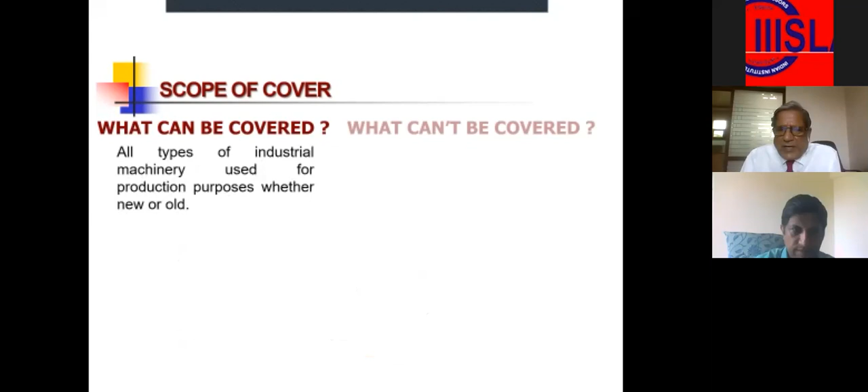Let's see, first of all, scope of cover. Now what can be covered in this policy and what cannot be covered? All types of industrial machinery used for production purpose, whether new or old, can be covered under this policy. What can't be covered? Machinery under erection and testing cannot be covered; only operational machinery can be covered here. Machinery under testing and erection shall be covered under the EAR policy and other policies. Computers and biomedical equipment are covered under electronic equipment policies, so they cannot be covered here.

Now, declined machinery - certain machines are declined by the insurance company because of the very high claim ratio: rolling mill stands, PVC lined vessels, oil-fired furnaces, pumps, and glass, graphite, rubber impeller lined, portable mobile equipment, and any imported machinery that cannot be repaired here. Now, this has changed, in fact.

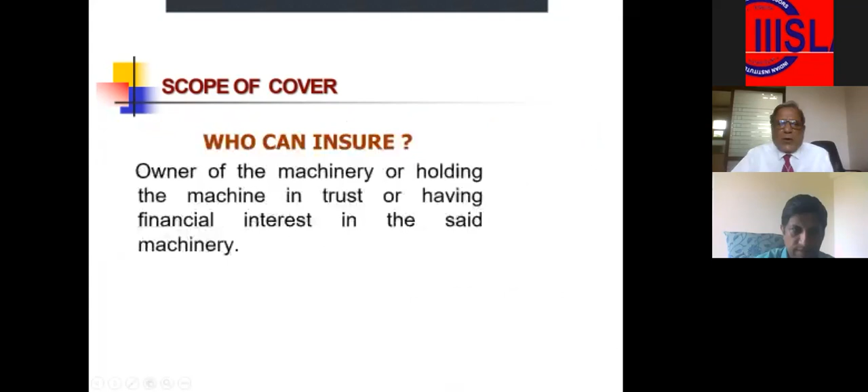Who can insure? The owner of the machinery, or anyone holding the machine in trust or having financial interest in it, can insure the machine, because anybody with an insurable interest in the property can insure it.

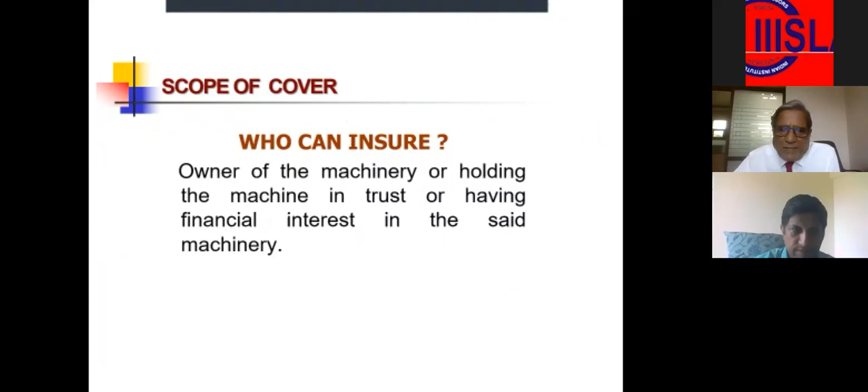What is covered under a machinery insurance policy? That's a very important point. Any unforeseen and sudden physical damage by any cause not excluded.

See this machine, if it's under breakdown, you can physically see the damage. But here, this is a card. If this card fails, you can't see the failure or the component that failed visibly. You can only find it using a multimeter or other electrical device or jig to locate where the fault has occurred.

So physical does not really mean visible. Here it is visible, here it may not be visible, but it may be electrically failed. So it also comes under physical damage by any cause not excluded. Can you say once more? Any unforeseen and sudden physical damage by any cause not excluded.

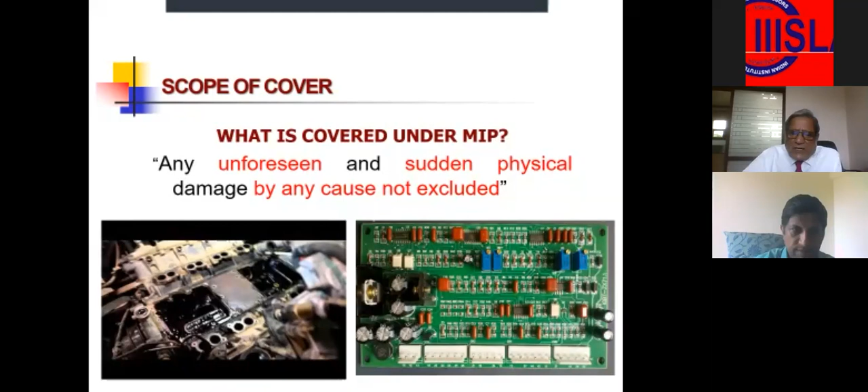Now, what kind of causes can we summarize in general, though the definition is quite large - any sudden physical damage. I have tried to summarize some mechanical causes which can be covered, but this list does not contain everything, because anything can happen. I have just given some broad outline.

Faulty material, design, construction or erection, vibration, maladjustment, misalignment, defective lubrication, loosening of parts, abnormal stresses, molecular fatigue, self-heating, centrifugal forces, explosion due to internal pressure, or implosion due to internal vacuum - these are the internal mechanical causes.

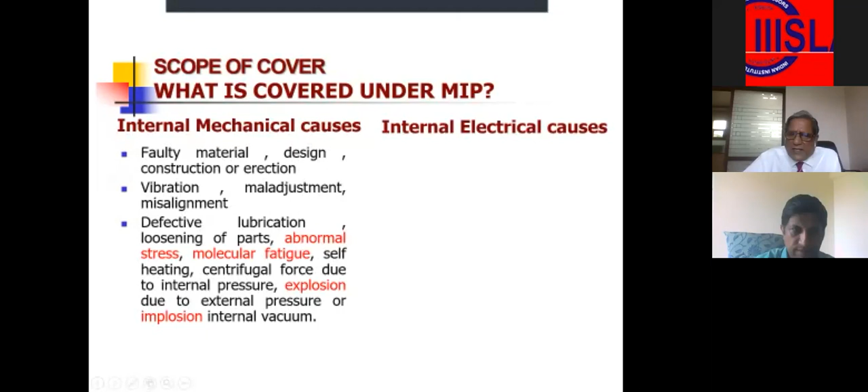Now let's see the broad internal electrical causes of breakdown: excessive electrical pressure, whether due to atmospheric electricity or otherwise, failure of insulation, overrunning, short circuit, leakage of electricity, open circuit, arcing including damage by internal fire so set up, and failure of connected machinery or protective devices.

Here you see atmospheric electricity - this means lightning. If lightning strikes somewhere as a result of which equipment fails, as I discussed in my previous lecture about the fire peril, it will be covered here in the machinery insurance policy, not in the fire policy, though lightning is a covered peril under fire policy. The reason, as I explained there, is because it is primarily a breakdown and it is excluded there. So even if it fails, it is covered under this policy.

Now I'll discuss a few of these things because there is a lot of confusion. Somebody will say molecular fatigue is not covered, somebody will ask what is excessive electrical pressure, somebody will say overrunning means overloading. So there's confusion about these terminologies. I've tried to clear this up - what is excessive electrical pressure, what we mean by overrunning, and what we mean by material molecular fatigue and abnormal stresses. Abnormal stresses may be confused with overloading, and overrunning may be thought to be due to bad operation, but that's not the case.

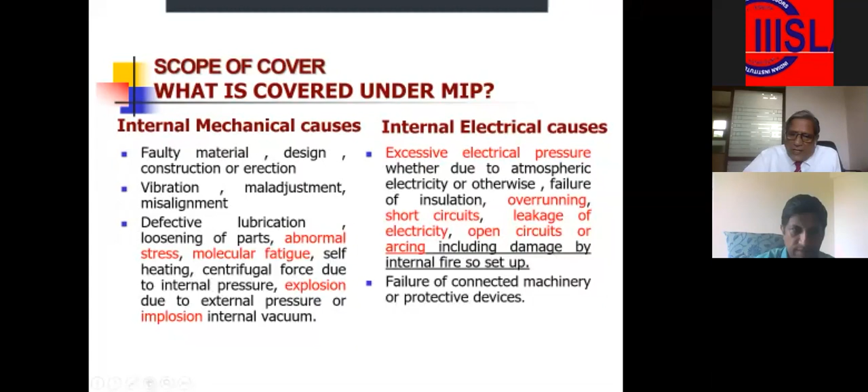Now the principle: if you see overrunning in a machine, when a motor runs, the output speed and torque both increase in current until it reaches the rated speed. All of you agree with this.

Having worked for a long period at rated speed, a back EMF is generated in the motor core, increasing significantly. Anybody who knows electrical engineering can say that if the motor runs for a prolonged time at the rated speed, a back EMF is generated. This is basically called Lenz's law. You must be aware of this.

Now, the highest torque is produced at what is called the knee point. Beyond this, when the motor goes beyond it, the back EMF starts increasing with constant power and proportionate reduction in current. It means the back EMF supersedes the actual EMF which tends to drive the motor, and this ultimately results in decreased torque, but the speed keeps on increasing beyond the rated speed till it reaches maximum possible speed. Operation beyond which causes damage to the motor, either thermal or mechanical.

So overrunning is basically nothing but when the motor is run for a prolonged period at this optimum speed, and the back EMF takes over the original EMF that produces the torque, which tends to increase the RPM, but the current will lower down. The speed will keep going on, and as a result there will be thermal and mechanical stress on the motor.

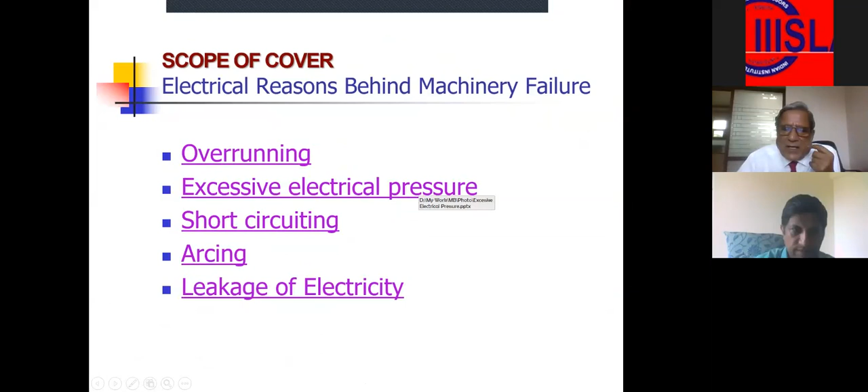The word 'pressure' is a little confusing. What do we need, what do we mean by electrical pressure? Excessive electrical pressure - what do we mean by electrical pressure? Let's see what we mean.

Now, electrical current moves with electrons in a conductor - that's the basic principle. The force which pushes these electrons to circulate in the conductor is called electromotive force, sometimes referred to as electrical pressure. The force which pushes the electrons to move within a conductor as a flow of electricity is called EMF or electrical pressure.

If there is a voltage spike, a sudden increase in voltage for a very short period of time in the supply, high current will be drawn by the connected load machinery. It also causes heavy losses to the equipment, resulting in heat generation. So a sudden voltage spike or push may lead to high current, meaning the machine will heat up and may fail. That is the meaning of excessive electrical pressure in machinery.

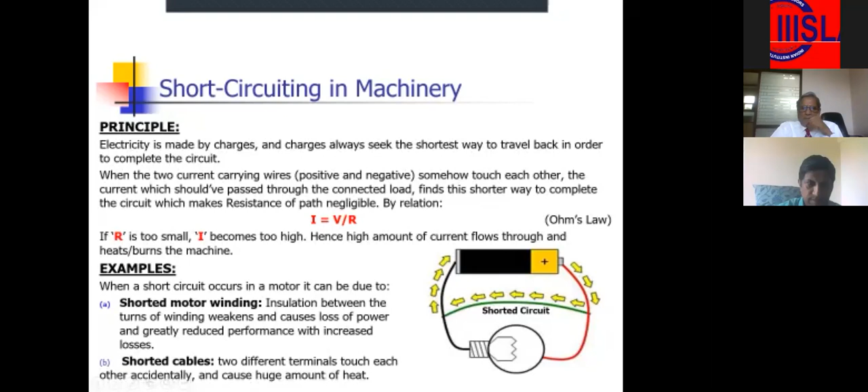Now what is arcing? When there is a gap between two oppositely charged terminals, the electron on the negative terminal tries to find a path to jump to the positive one. The electron is desperate to create a conduction through the non-conductive medium, which is air. Now, if the potential difference is sufficiently high between these two connections, in spite of their gap, it tends to ionize the air occupying the gap between them.

The current passes through the air, producing plasma, which may produce visible light. But the condition is there should be a sufficiently high potential difference between the two terminals, only then this will happen. Plasma is basically the fourth state of matter, other than solid, liquid, gas, which exists only at a very high temperature.

Here you see a high current connection in a HT line. Just as it releases, you see how much flash it generates. This is the arcing, this is basically the arcing.

The definition of an open circuit is a broken path for an electrical current due to an open switch or frayed wire. When this terminal accidentally gets near any metallic body, sometimes the machine itself, it produces an arc with very high temperature, with visible spark that can cause fire and other severe damage to the machine. This is how you see fire basically due to arcing in an electrical machine.

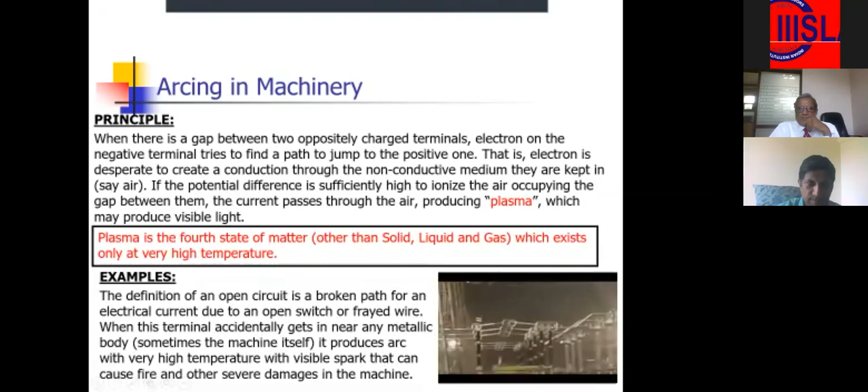Now, I have discussed 3 important electrical reasons. Now I discussed 3 important mechanical reasons. There's generally confusion about why specifically I've chosen these 3, because abnormal stresses get confused with overloading, molecular fatigue gets confused with electrical manufacturing defect, and explosion implosion, as you know, is covered in the fire policy, but the equipment causing explosion is excluded there, which is covered here in the machinery policy.

Now let's see abnormal stresses. These are the kind of stresses we face when any machine, any part working within a machine, can be stressed due to several reasons. It may be a compressive stress, it may be a tensile stress, it may be a shear stress, it may be a torsional stress, it may be a bending stress. By the picture you can see that any part, any machine, can have these kinds of stresses during operation.

But if they are sustained for a long time and not addressed by the operator or by the maintenance, they can result in the failure of the machine. Pushing, squeezing against something is a compressive stress; tensile stress you see by these directions; and shear stress is just shearing, slippage along a plane causing change in shape; twisting of a structure or shaft is called torsional stress; and this is bending and reshaping of a structure. So these are broadly the abnormal stresses in machinery.

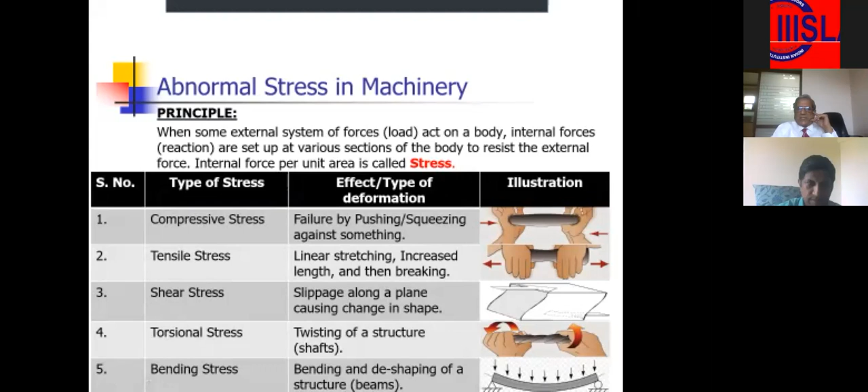Now molecular fatigue, that's very important.

Fatigue is the weakening of a material caused by cyclic loading that results in progressive and localized structural damage and the growth of a crack. Once a fatigue crack is initiated, each loading cycle will grow the crack a small amount, typically producing striations on some part of the fracture surface. This leads to the ultimate failure of the machine.

It slowly grows; a small crack appears in a cyclic motion. An example is a machine that involves reciprocating or repeated motion with a certain amplitude, like a piston cylinder. They are most prone to it. The fatigue failure is caused by initiation and propagation of cracks developed in the piston as a result of undesirable operational condition and material defect.

So anything moving in a cyclic motion, once put to stress, will create fatigue, and that cyclic load, if not addressed and it keeps increasing, will create a crack. These can be witnessed in a number of pistons when they are opened during normal operation. Even an engine, if it is working without any problem, if you open it you'll find this fatigue mark. Though it has not resulted in any breakdown, you can see the fatigue mark in the engine.

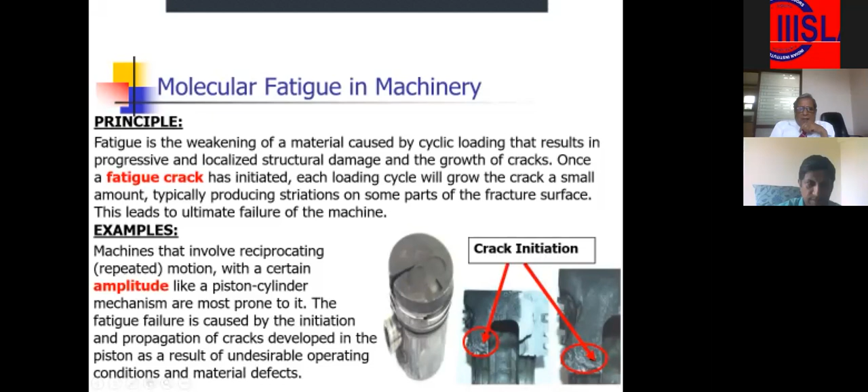Now, explosion and implosion. When a machinery structure that works under pressure cannot withstand the internal pressure buildup due to any reason, it results in the fluid coming out in a violent burst. This is called explosion. Here you see a rod, and every material of which the tank is made has a certain tolerance, a certain capacity, and if it goes beyond that, it will yield and produce an explosion effect. When the pressure inside the pressure vessel increases past the ultimate stress, it explodes violently.

It can occur in a compressor, boiler, etc. So this is a typical case of explosion. And this is a simple experiment showing it.

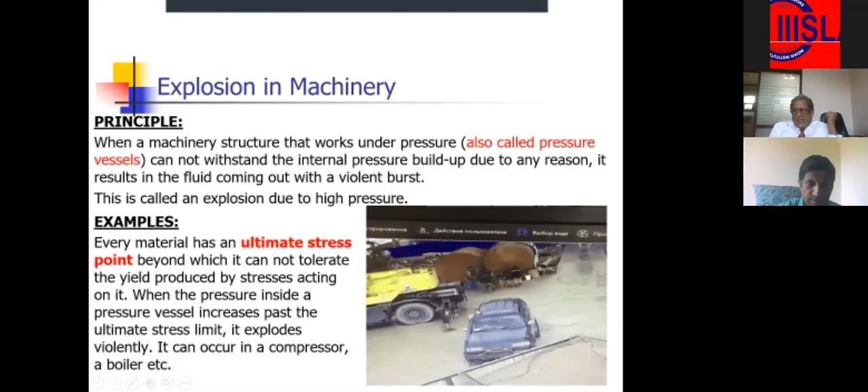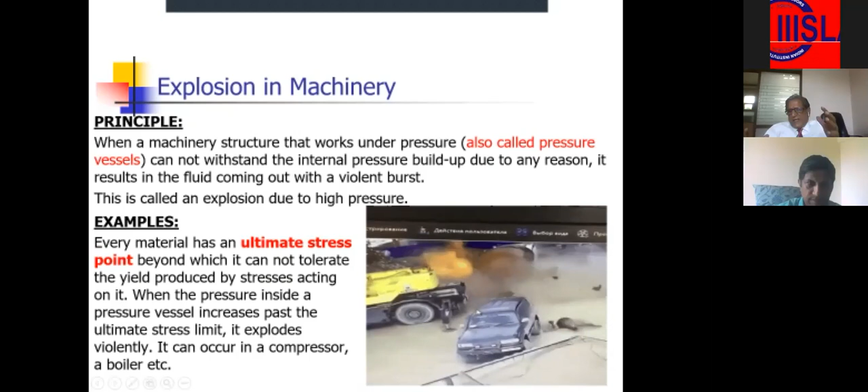Here you see a small container which has a chemical, a hot chemical in the form of gas, containing some residual hot chemical. And if you suddenly cool it, what will happen? The particles of the chemical, which have high molecular energy within this drum, will come closer because of the cooling, and suddenly it will collapse.

It will collapse inside. Originally there was a high temperature of the chemical inside, so there is molecular energy and a gap between the molecules. But once you cool it with cool water, sudden cooling will result in releasing of the molecular energy, with the molecules coming closer and causing a collapse in the drum. That's it.

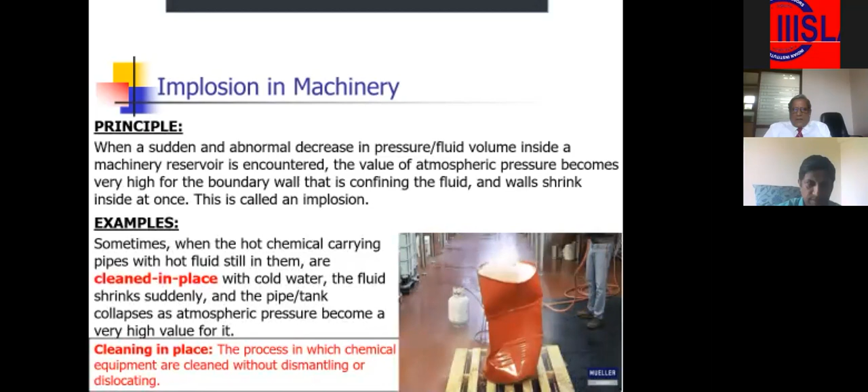Now, these basically explain the phenomenon using Ohm's law. If a short circuit occurs, it means resistance is nil, current is high, and voltage is nil. Open circuit means resistance is very high, voltage is very high, and current is nil. Excessive electrical pressure means voltage is very high, resistance constant, and current very high.

Leakage of electricity means current very high, heat generation very high, and losses very high. So these are the phenomena, these are the events which may occur, and these are the phenomena you can observe. This is basically nothing but Ohm's law, and based on this, these things are explained here.

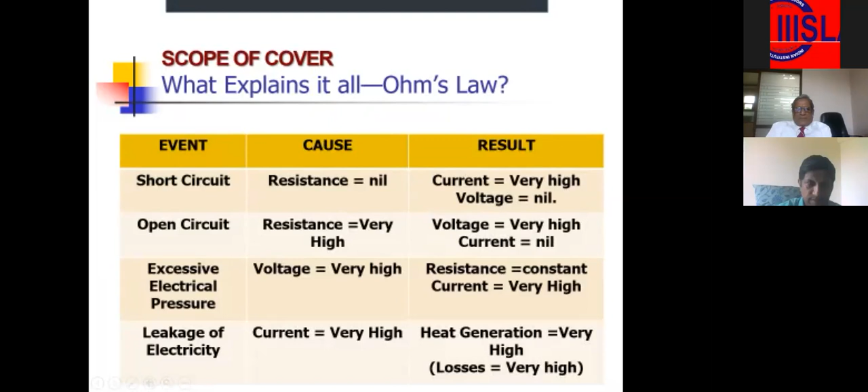Now, coming to what is covered under a machinery insurance policy. What is covered? External causes, lack of skill, carelessness or malice of a person. This is also covered, whether in the insured's employment or not.

Earlier we discussed internal causes, mechanical causes, and electrical causes. Now we are discussing external causes, which are neither mechanical nor electrical. Lack of skill, carelessness, or malice of a person, whether in the insured's employment or not, is covered in the policy.

Falling, impact, collision - if something fell on the machine during operation, it is also covered. It's not purely about breakdown occurring. If something fell on the machine - a machine is tall and something fell on it - it is also covered, or if the machine fell during shifting or during operation, it is also covered in the policy.

Obstruction or entry of a foreign body is also covered. Now, location of cover - the scope of cover is over, now coming to the location of cover. Where can it be covered? What are the locations of cover? The cover remains in force at the insured location, whether the machine is at work or at rest, during dismantling for the purpose of cleaning or overhauling, during shifting within the premises, or during subsequent erection.

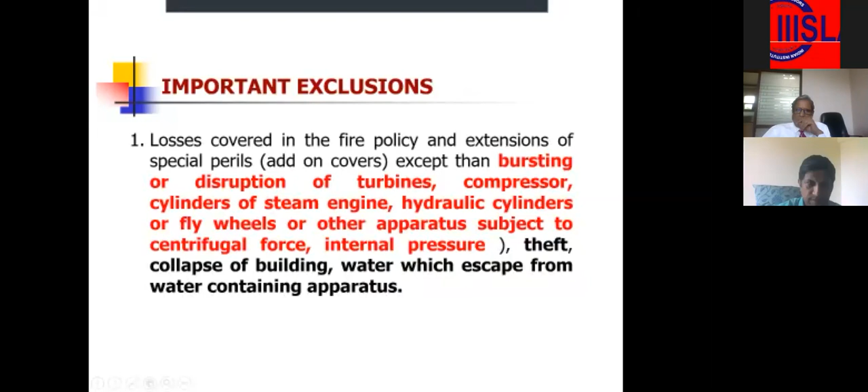Now see the difference between bursting, disruption, and explosion. There are two things: bursting due to centrifugal forces or internal pressure in a mechanical or hydraulic equipment. So there's a difference, you should not confuse bursting with explosion and disruption. I'm trying to give a point-wise explanation here.

Bursting due to centrifugal forces or internal pressure in mechanical or hydraulic equipment normally occurs in equipment having centrifugal or reciprocating movement, an impeller under pressure like a turbine. It normally occurs after an internal breakdown. The proximate cause is a mechanical failure, and the effect you see is like an explosion because of the pressure.

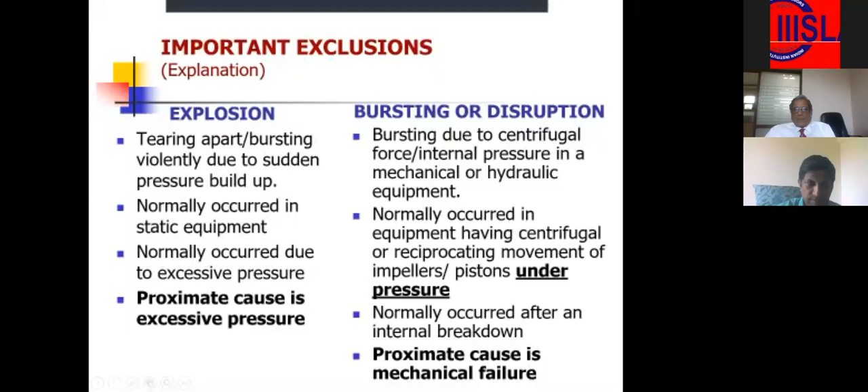Now there's another extension: control of electrical exclusion in fire policy. What is excluded in the fire policy as electrical exclusion is being included here. If you compare, there the word was lightning excluded; here the word is lightning included. So it is just the reverse - whatever is not covered under electrical exclusion in fire policy is covered here in the machinery insurance policy.

Any loss or damage by fire within the electrical appliances and installation insured by this policy, arising from or occasioned by overrunning, excessive pressure, short circuiting, arcing, self-heating, or leakage of electricity from whatever cause, lightning included, is covered, provided that this extension shall apply only to the particular machine, apparatus, fixture, fitting, or portion of the electrical installation so affected, and not to other machines, apparatus, fixtures, or portions of the electrical equipment which may be destroyed or damaged by fire so set up.

Now this is the current state of electrical inclusion in the machinery policy, which is the control of electrical exclusion. Now let us see what the electrical exclusion in the fire policy is, and let us compare.

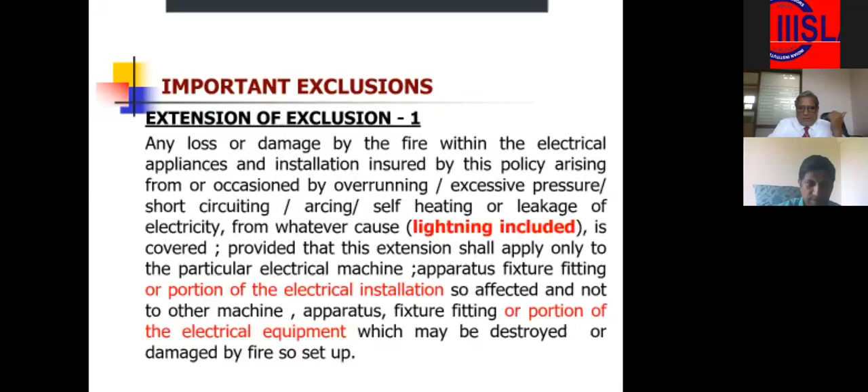So before 2001, they are just contrast. What is being included here is excluded here, and what is being excluded here is included here, right? But after 2001, a change is made in the fire policy. What change is made?

A portion of electrical installation is what is removed here. Now, in the exclusion of the fire policy, a change is made: apparatus, fixture, fitting, or any portion of the electrical installation is changed. What does it mean?

Now, suppose there is a control panel and there is short circuiting in one cubicle of the control panel, and suddenly the supply from OCB trips, and other cubicles of the control panel burn purely because of the spread of fire from the cubicle which underwent breakdown, while other cubicles burn because they were not charged since supply was tripped from OCB. So they are all other portions of the electrical installation.

So before 2001, if the surveyor was able to prove that only this portion of electrical installation was damaged due to breakdown, and this other portion was not damaged due to breakdown, then he could pay that claim under the fire policy for the portion which was not damaged due to breakdown.

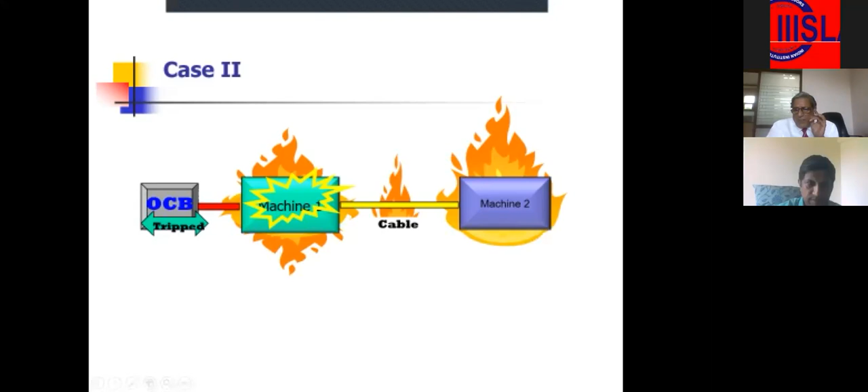Now another case: this is machine number 2, there's a cable connector, and there's an OCB. What happened? Short circuiting occurred here in the machine, it catches fire, and the OCB trips. Now the fire traveled through the cable to machine number 2. In this case, this is covered under the MB policy, and this is covered under the fire policy. This is the anatomy of fire and electrical exclusion I'm discussing.

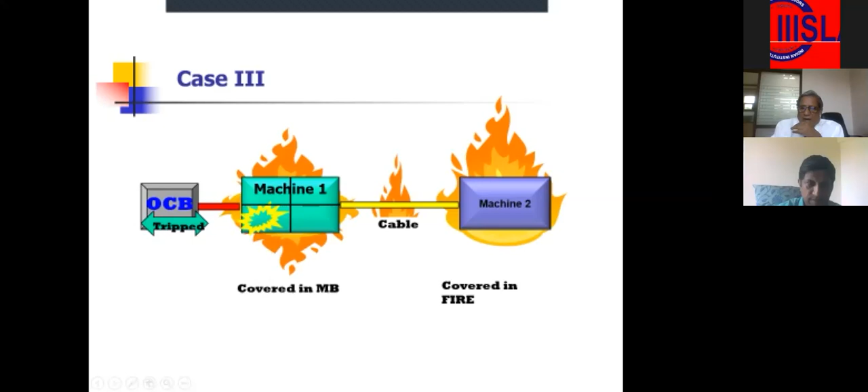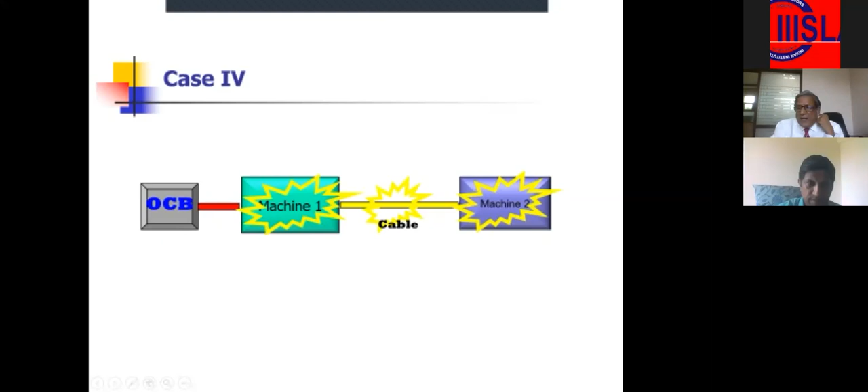Now case number 3: this machine, also machine number 1, has 4 parts. Short circuiting occurred here, and because of the short circuiting, fire spread here and reaches here. There's a short, and there's also a short here in the cable—it doesn't trip even at that time, and this short circuit goes through this machine also. The cable shorts, machine 2 shorts, then it trips, then it catches fire—then both are to be covered under the machinery breakdown policy.

So these are a few glimpses to clarify the electrical exclusion and the impact of electrical exclusion and mixing with the fire policy.

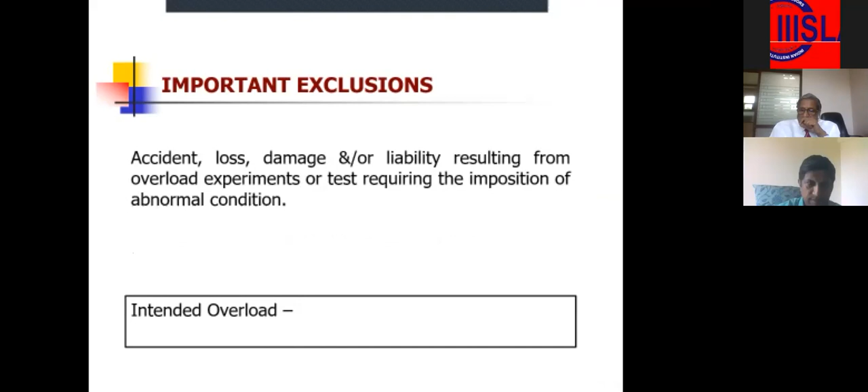Now an important exclusion: accident, loss or damage or liability resulting from overload, experiment, or test requiring the imposition of an abnormal condition are not covered. Intended overloading is not covered, but accidental overloading is covered. Remember, you should not confuse the two. Sometimes the machine accidentally overloads during operation - that is covered. What is not covered is intended overloading, when we test an equipment for overloading.

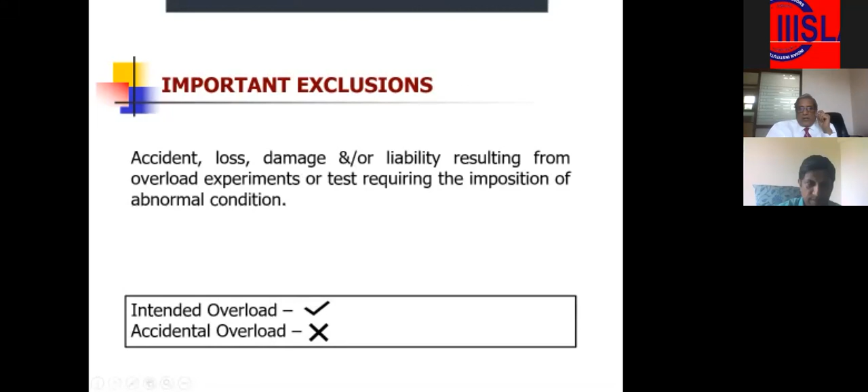Now that's a very important point which I want to discuss: gradually developing flaws, defects, cracks or partial fracture in any part, not necessitating immediate stoppage, although at some future time repair or renewal of the parts affected may be necessary.

Many times we use this to repudiate claims. Surveyors use this because they say it's a developing flaw, a developing defect, because every defect is developing, every crack is developing. But what does it really mean? Every crack will develop - you'll say no, we'll not take this.

Gradually, a crack will develop gradually. But what is the premise of this exclusion? Why is this not a sudden unforeseen damage like any other, and what is the borderline which demarcates this exclusion from the coverage of the policy? Let's see.

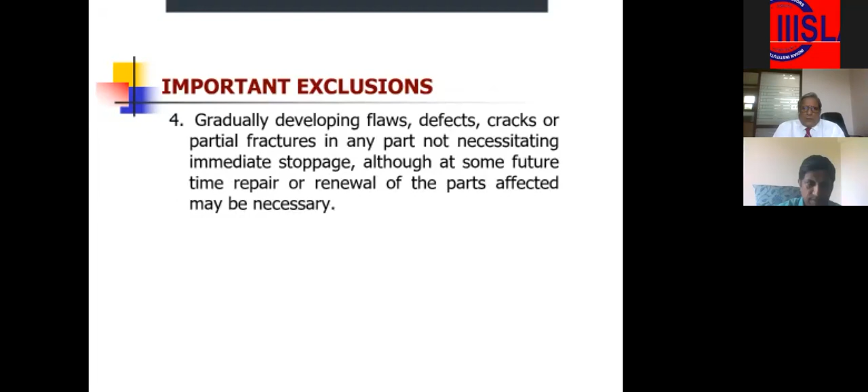Now let's analyze the exclusion. Any flaw, defect, crack, or partial fracture gradually developing is one part. Another part says the defect does not require immediate stoppage, although the part affected is to be replaced or renewed at some future time. So there are two parts to it, and we have to read it twice.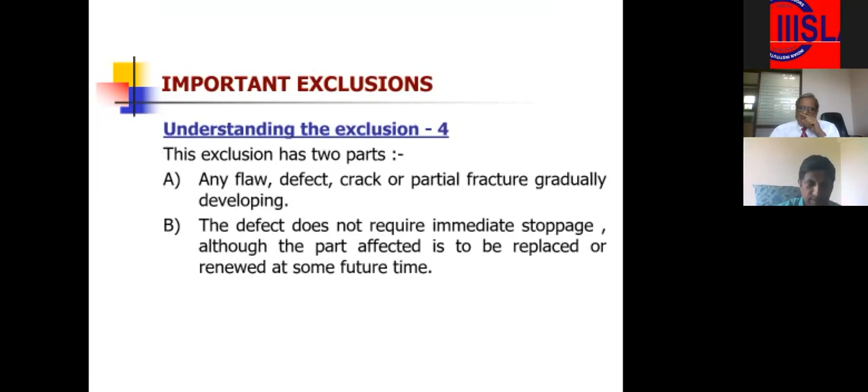Now a very interesting case has come up. What happened? In one case, a DG set engine has seized. When it was brought in to repair for normal seizure replacement, the piston was replaced, and when the crankshaft went for grinding - because the crank is to be ground every time - they observed a crack on the pin.

Now the engine was running with that crack for quite some time. It is still there - it had not been noticed had there been no seizure. It only came to notice when it seized and was brought to the repair workshop, and when it was for grinding, it was observed that there was a crack in the pin.

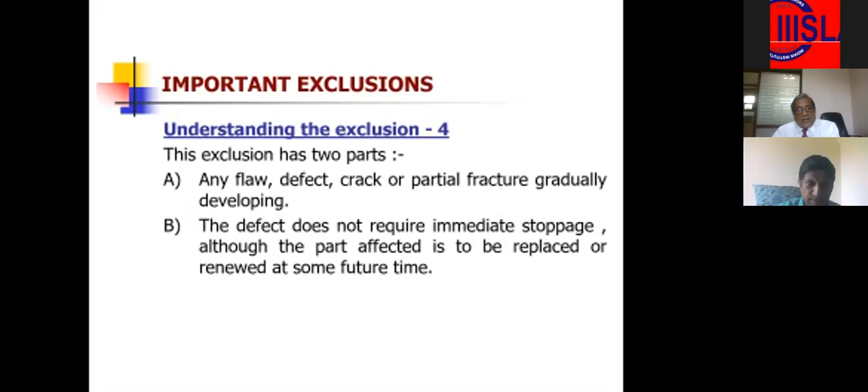Now you can say it's a gradually developing flaw, a gradually developing defect. But point number two: can you use that crank knowingly that it has a crack, even though it can be replaced at a later time? Can you use it though it was working? You can't - it is technically to be replaced once this came to knowledge. There are two parts to it, which you should keep in mind.

Now I'm giving some examples of this gradually developing flaw. Pitting in turbine blades - anybody who's seen a turbine often observes pitting, usually caused by water in the steam during operation below rated inlet steam pressure or flow. You see pitting marks on the turbine. It does not require immediate replacement, but it's gradually developing. At some later point, you find it is to be replaced. So this is a case of a gradually developing flaw or defect.

You see these pitting marks. Another classic example is electrostatic corrosion in the cylinder liner on the side facing the cooling. If you pick out any cylinder from the cylinder block and look at the side facing the coolant, you find these pitting marks. These are not random signs - they are basically the sign of electrostatic corrosion, because flexing of the cylinder wall causes the cylinder liner to vibrate and create vapor bubbles in the coolant.

These vapor bubbles form on the outside of the cylinder wall and explode inward, or implode, resulting in tiny pits in the cylinder wall's protective oxide layer. This is also called electrostatic corrosion, and this phenomenon is a case of gradual deterioration. In one case, this became so deep that water came through the pitting mark into the cylinder. But these are gradual - you need not immediately replace, because whenever you open a cylinder liner, you find these marks in small numbers. It's a phenomenon of electrostatic corrosion.

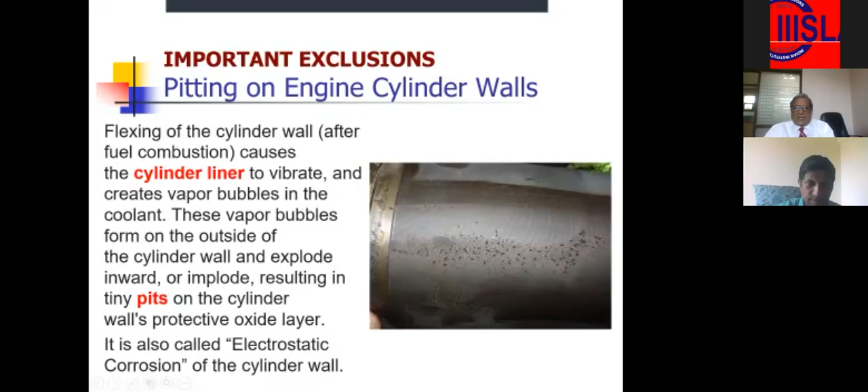Now this is also the warping of the cylinder head. The warping of the cylinder head is caused by a condition associated with cracking, namely overheating. When the head is heated past normal operating temperature, it expands past its limit. As it cools off, it will not return to its original size or shape, instead settling into a more bent or distorted form if repeated too many times.

So these are all examples of a gradually developing flaw. The purpose is to exclude these, as these are normal operation flaws, which may occur because of several reasons: the operating condition is not fine, the material of construction may be defective, there is a sudden load varying, or there is a local condition.

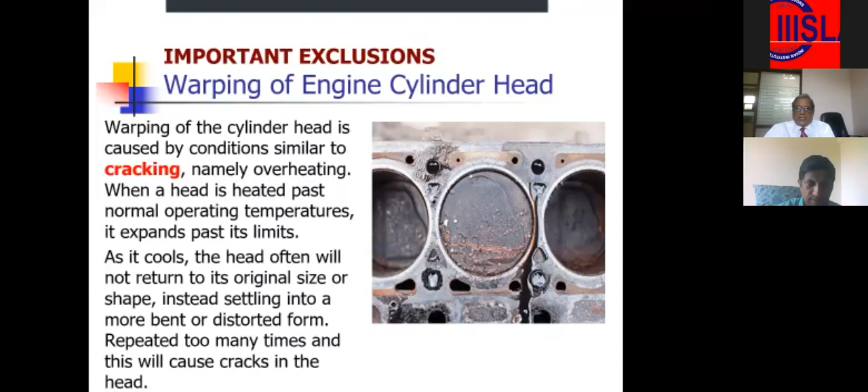So these are the flaws which you physically see, but they do not conform to sudden physical damage and do not conform to breakdown. Now another exclusion is deterioration or wearing away or wearing out of parts, which the policy covers excludes as depreciation. In indemnity, parts which are wear and tear, like bearings and bushes, have to be excluded.

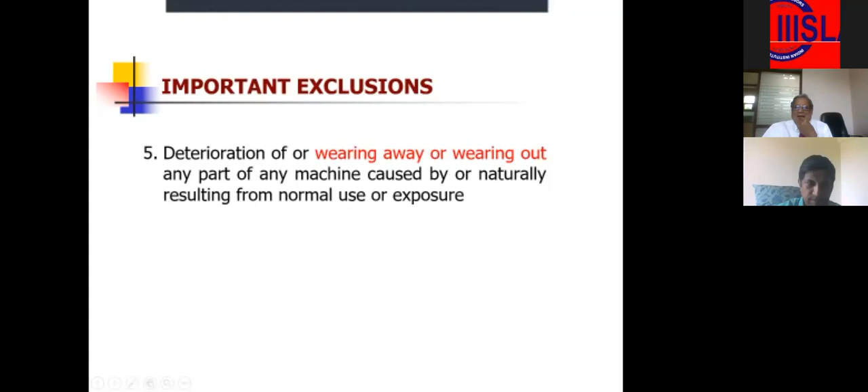Now that's another: loss or damage or liability caused by or arising from willful act, willful neglect, or gross negligence of the insured or responsible person. Now there are two things: willful act, willful neglect, or gross negligence. Earlier, if you see the old policy, you will not find this willful act and willful neglect, you will find the word gross negligence.

Because you all know negligence is covered, what is not covered is gross negligence. But it's very subjective, how can you confirm that this negligence is gross? A negligence has occurred, a negligence has been done by somebody, and only he knows whether he has deliberately done it or it is pure negligence. You have no thermometer to put in his mouth to find out whether he has done it deliberately. Knowing negligence, gross means knowing.

You know the outcome of the negligence even though you conduct it, that is called knowing negligence. But how will you know? Because that person will simply say it's negligence, right? So new words have come: willful act and willful neglect, to make it very clear. If it is done willfully, willful act and willful neglect, or gross negligence - but still application of this clause is very debatable, and surveyors are often misusing this term against the insured. This is gross negligence. There are two terms being widely misused by surveyors.

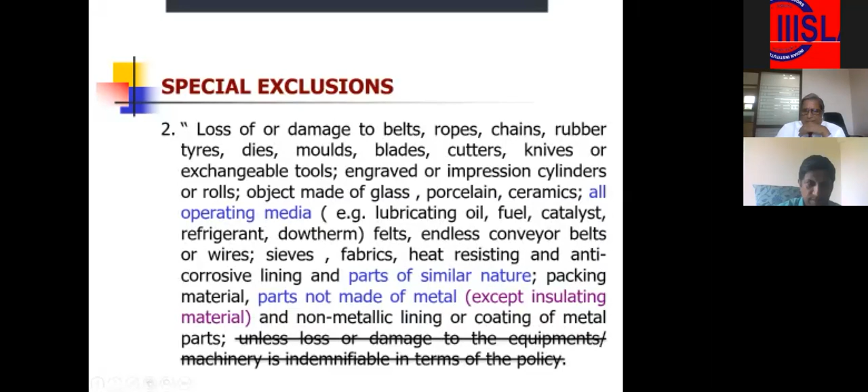Loss or damage for which the manufacturer, supplier, or repairer is responsible either by law or by contract. It means if you're buying a product, and under the purchase agreement there is a contract existing between the buyer and the seller that he has to make good for a certain period - that is called the warranty - then if some loss has occurred, it is the duty of the insured to first claim on the warranty. If it comes under warranty, he has to push the claim for the warranty. The balance part which does not come under the warranty is only payable.

And if it does not come under warranty, then it is payable. So the purpose, whenever you do a survey of a new machine, always look for this - whether it is under manufacturer, supplier, or warranty. Ensure if there is a warranty, then write a letter to the insured that he should first press the claim on the supplier under the warranty. Now many times, because it is difficult for the insured to deal with the supplier for the warranty claim, they instead prefer to press a claim on the insurance company. But as a surveyor, you should always tell him, no boss, you have to press the claim on the warranty first.

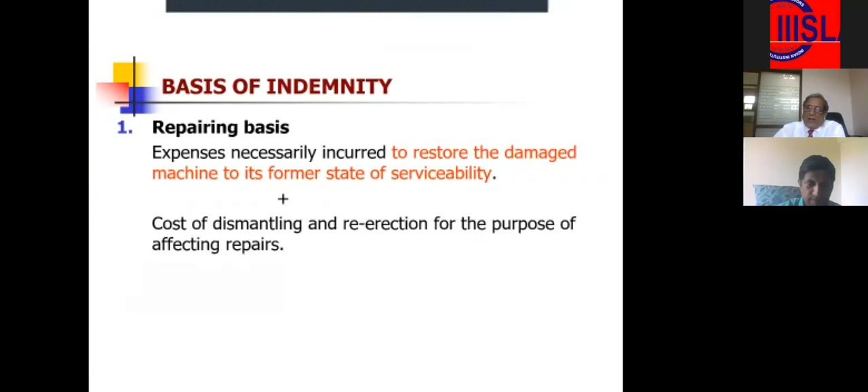Now, repairing - there are two bases: repairing basis and total loss basis. First we'll discuss repairing basis. Expenses necessarily incurred to restore the machine to its former state of serviceability - these are the bases, plus cost of dismantling and re-erection. These are the broad outlook of what we'll pay: expenses necessarily incurred to restore the machine to serviceability, and cost of dismantling, re-erection, for the purpose of effective repairs.

Ordinary freight to and fro repairer workshop will pay, and custom duty to the extent included in the sum insured.

Now, to the extent is governed by additional custom duty clause. It means the rate at which the machine is insured, the same rate will be applied on the part. It's not the value, it's the rate, not the total value of cover for additional custom duty. It means the rate at which the custom duty is covered - if 12% rate is covered and the parts come with 15% rate, the company will indemnify you for the 12% rate.

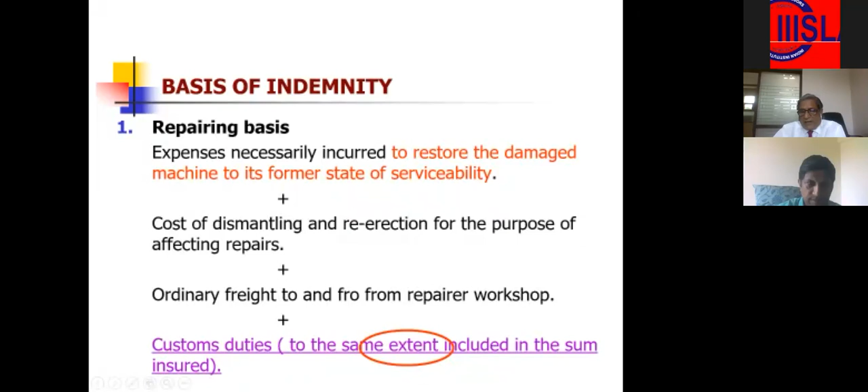In consideration of the insured having paid additional premium, it is hereby agreed that the company shall indemnify, during the currency of this policy, the additional custom duty.

This is why that 3% difference will be taken care of here. By having this additional custom duty endorsement, the difference of 3% which you have not covered with the original sum insured in the machinery - suppose a machine comes with 12% duty and the parts come with 15% duty - this additional custom duty endorsement will take care of that 3% difference.

So that's why you need to have an additional custom duty endorsement to cover that excess amount, which is not ordinarily covered in the policy.

In consideration of the insured having paid premium, the company shall indemnify towards the additional custom duty amount which may be incurred by the insured over and above the custom duty amount taken in arriving at the sum insured. Whatever rate of duty you have applied in arriving at the sum insured, and the difference in the spare part rate - that will be taken care of by the additional custom duty clause.

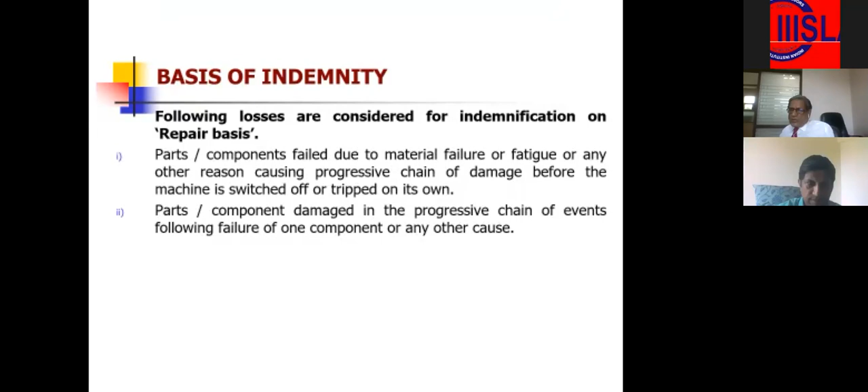And now progressive damage means that during the time the engine remains in motion, there will be progressive damage till it is finally stopped - to the engine block, cylinder block, and other parts in the chain of events before the machine stopped on its own after the breakdown. They are also to be covered.

Then there are parts or components not damaged physically yet technically required - certain parts which are neither physically damaged directly nor because of the progressive damage, but in order to repair the machine and reassemble it, you have to replace them, because the policy says to put the machine to its former state of serviceability.

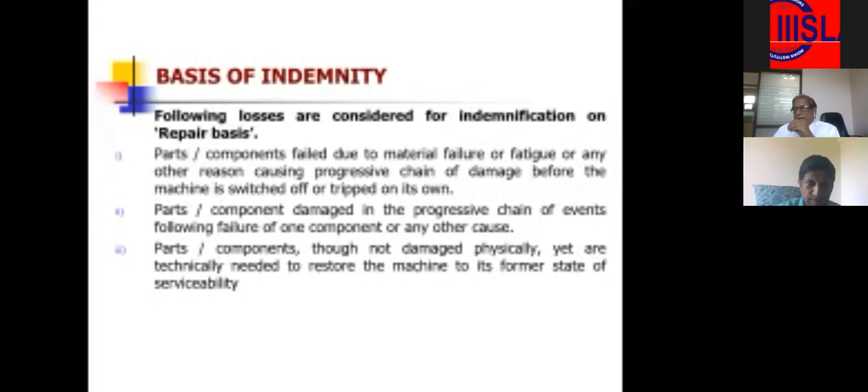Suppose the engine seizes, something happened, and you open the engine and you need to recalibrate the oil pump. Though it is not affected, it is a necessary requirement to put the machine to its former state. Similarly, all gaskets, or metallic gaskets, are to be replaced. Or similar things which are a technical requirement, like the injector - you have to calibrate the injector in order to put the machine to its former state, though they are not directly damaged. So whatever is required to put the machine to its former state of serviceability.

So there are three components: parts directly damaged, parts progressively damaged, and parts required for technical necessity to restore the machine's serviceability.

A few parts and components are solely replaced in the complete overhauling process. For example, rubber hoses, fan belts, rubber pads - these are replaced by the repairer as a consequence of their warranty obligations. Such parts are not payable. There are certain parts, rubber hoses and rubber parts, which are replaced whenever the overall engine is overhauled, but they are not payable.

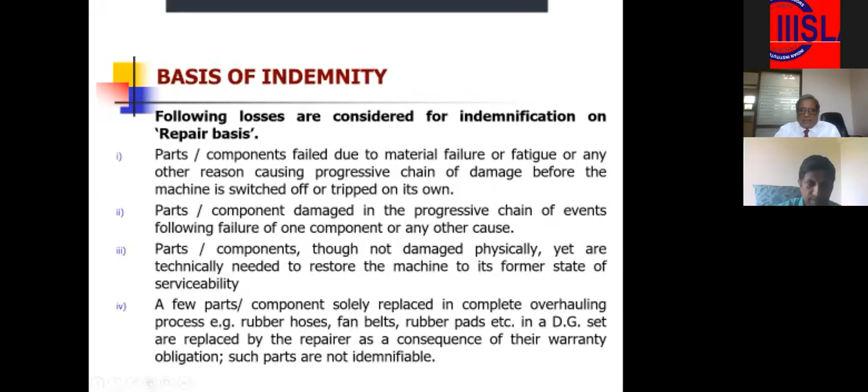So basically these three kinds of parts are to be considered. This is an engine after an overhaul, a major overhaul. Now, repairing basis.

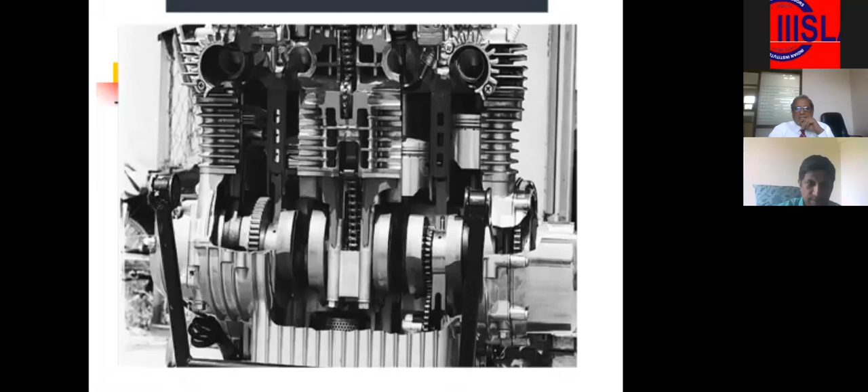Now this is, we have discussed what is payable in repairing. Now there are three kinds of repairing: one, you get it repaired from an outside agency; there is a provision for provisional repair, you can provisionally repair at home; and there is a provision for in-house repair. We'll discuss one by one.

Now, outside agencies: cost of parts/components directly damaged, cost of parts from outside agency. Suppose I give my engine to the outside agency. Cost of parts/components damaged due to progressive chain. Cost of parts/components necessitating technical replacement. Depreciation for wear and tear parts - parts for which the manufacturer has specified a fixed life for use.

Now here I want your attention, because that's very important. Generally, surveyors have a tendency to deduct depreciation on each and every part in a machinery insurance policy, which is not right, because this is not a policy where you deduct depreciation for all parts. And if you are deducting depreciation on everything, then what is the point of having the requirement of new replacement value?

So always keep in mind that the indemnity is to put the machine to its former serviceability. And when you say to put the machine to its former serviceability, always keep the basic principle of mechanical engineering in mind. The principle says that if there is a movement, one part is made of soft material and one part is made of hard material. Suppose a crank is to move, it moves in a crankcase, so in between these two we need a bearing. Otherwise there will be huge friction and both the crankcase and crank will get damaged. So we need a bearing, and bearings are made of softer material.

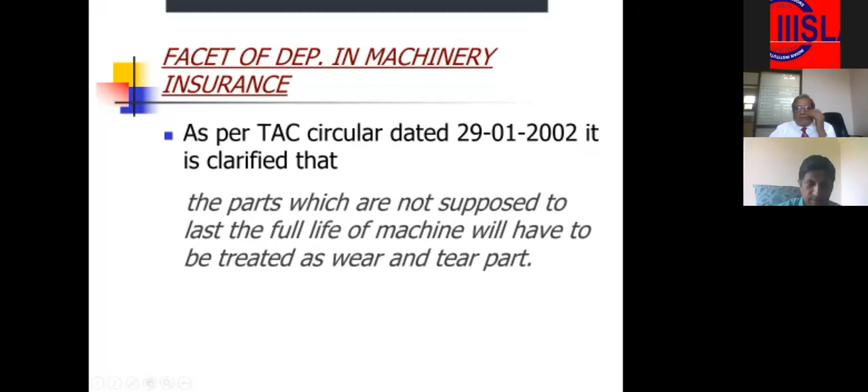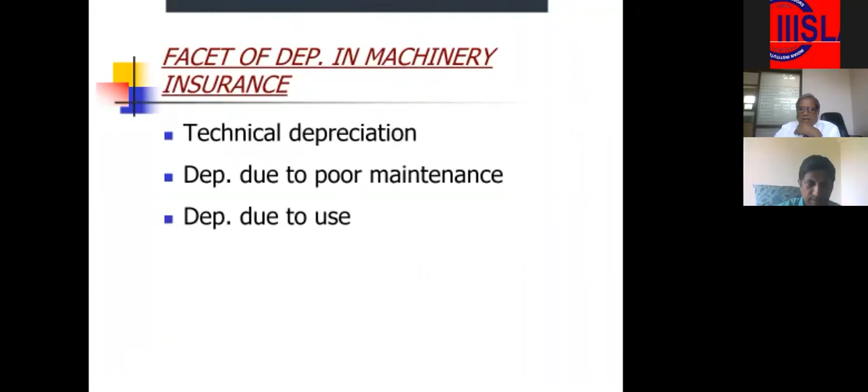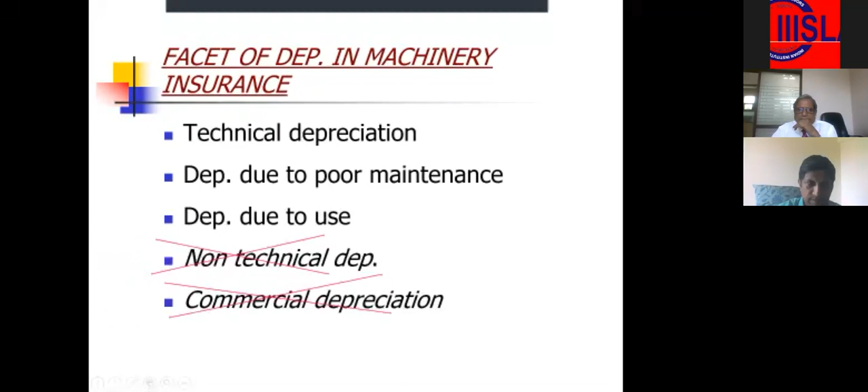Now we'll discuss a few case studies. I'll discuss some parts like a solenoid valve. Now, a solenoid valve - is it a wear and tear part? Suppose it fails, do you replace it with depreciation or not? I think it's one of the self-sufficient parts, a contained equipment - it has a separate purpose on its own. So when it fails, I think we should deduct depreciation here, because it's just like if a motor fails in a blower machine - that's a constructive loss, so we deduct depreciation here.

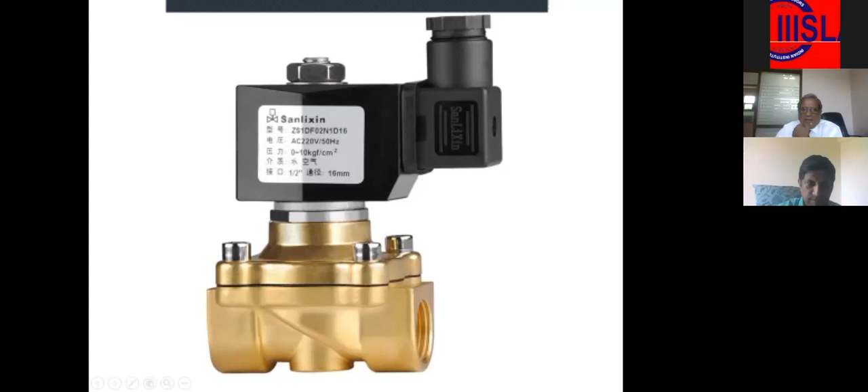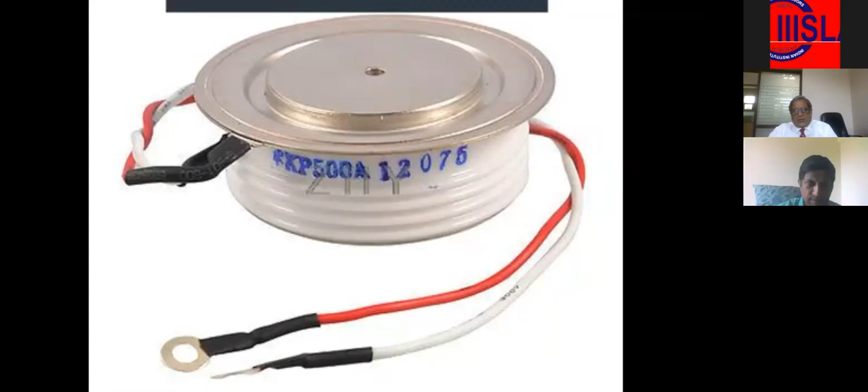Thyristor. You must have seen these in furnaces - rectifier thyristor and inverter thyristor. So they fail, but do you need depreciation? I think we should not, because these are not an item of limited life. It may work for days, it may fail immediately. Due to operational conditions it may wear out, but technically it does not wear out. It has no pattern of wearing out, and no supplier gives a given life stating it will run for so many hours. People may have argument on this - learned people watching this presentation may disagree, because I have seen somewhere, but I have not found any literature which suggests thyristor is a limited life part in the sense that it will work for this much hours. So in my opinion, it is not limited life.

Then capacitor - a classic example. There are certain things which technically do not wear, but they wear. If you ask somebody, will it wear? Technically, no, it will not wear, but it does wear out. Like a picture tube, a cathode ray tube - it does not wear out technically, but it does. Similar thing with the capacitor. Capacitors get weak with time, get weak with use, and they are a part in the equipment. So if I had to deduct depreciation, I will deduct it with the plea that it got weak, because weakening depends on how much time and how frequently it is used.

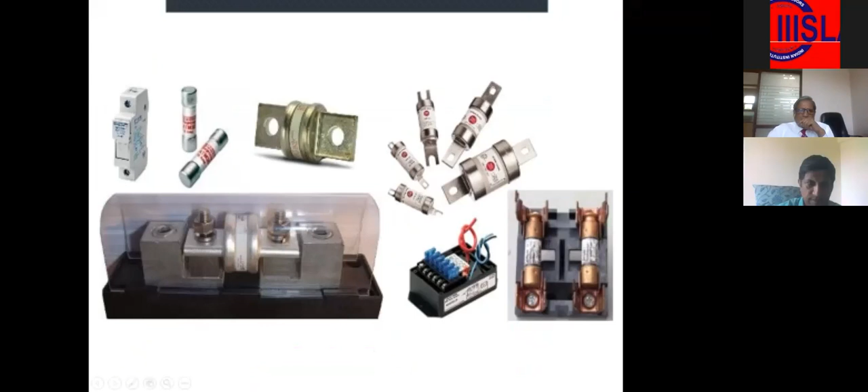Now fuses. Sometimes we say fuses are not covered because they are protective devices, but the policy does not say so. If fuses are not covered, though they protect the circuit, they fail as a consequence of protecting it. And in many equipment, the fuses are very expensive. So fuses are covered in my opinion - they are not excluded anywhere, and once they are not excluded, they are covered. They are also not a limited life item.

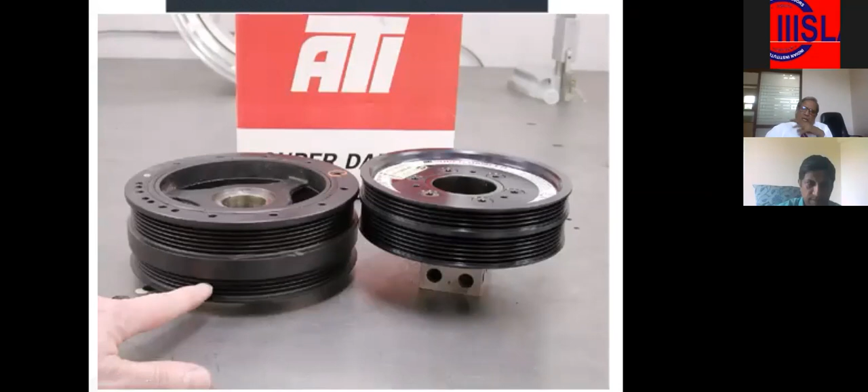Then damper pulley. Damper pulley is a pulley which gives some balance, and there's fluid moving inside it. During operation, there can be some disbalance in the pulley, and whenever they replace it, it's because of a major failure, or a major failure in the engine. So they change the damper pulley because the fluid dynamics inside it changes. So I think it is also not an item of limited life.

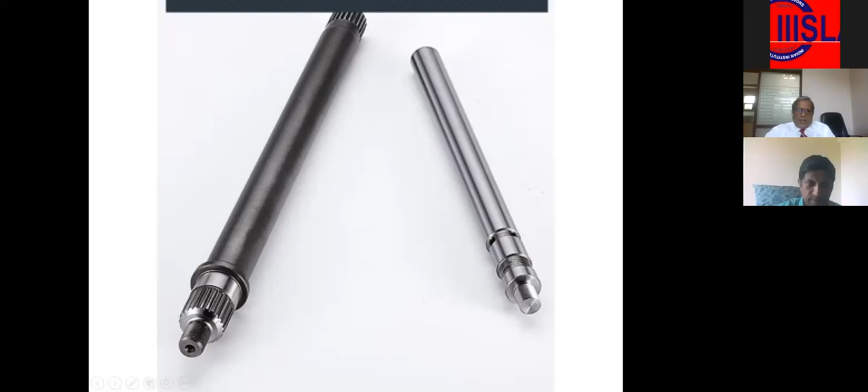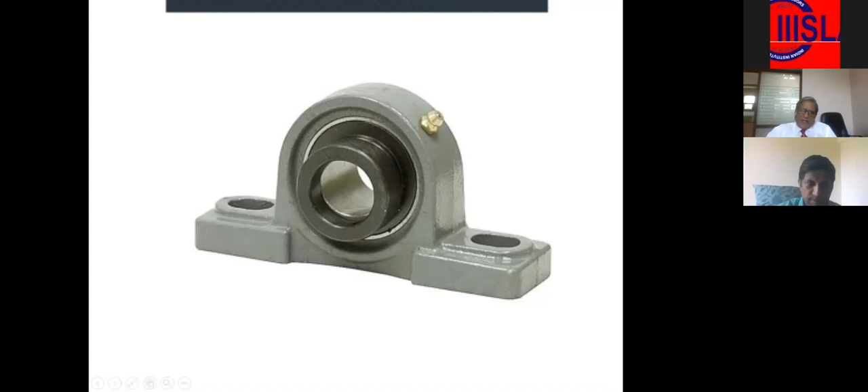Pressure switch. Now here comes the third condition of TAC - anything which does not last till the life of the equipment will be considered a total loss. Now the pressure switch normally does not last till the life of the equipment - it needs to be replaced during the entire life of the equipment. So in my opinion, with this consideration, though pressure switch is a device, an electrical device, and it's an independent device, since it does not last till the life of the equipment, it should be treated as a total loss.

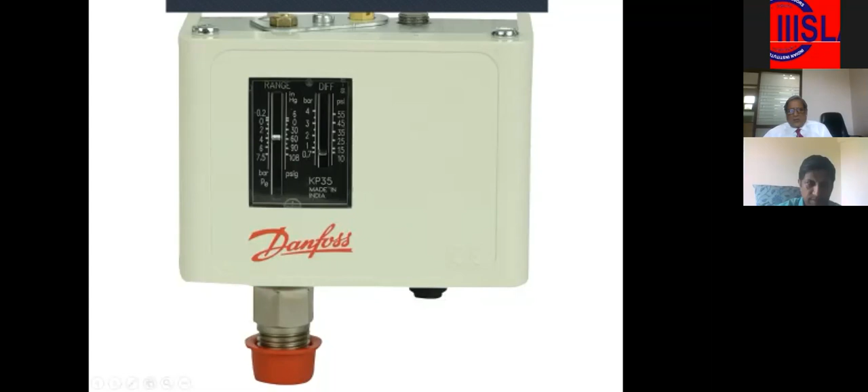Now, they also do not last till the life of the equipment, so they are also treated as such.

Now shell and tube heat exchanger - they are a long life item. It does not wear out, does not wear out. So it is not subject to any depreciation.

Crankshaft is a classic example. Now here, is crank a wear and tear item or not? What is the opinion of the house? You give your answer in the chat box - is it a wear and tear item or not?

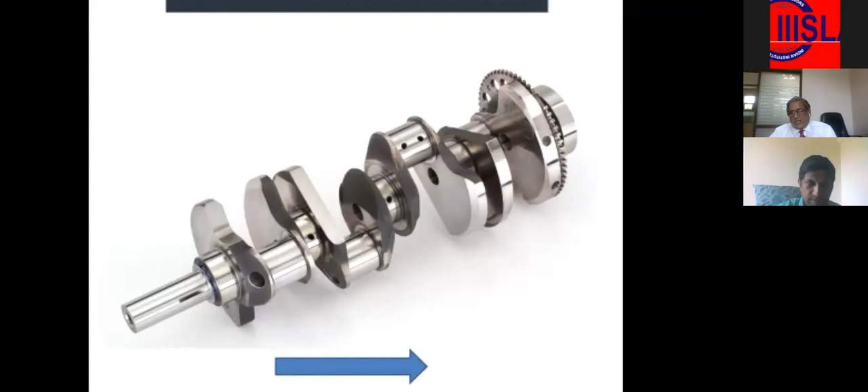It should, but it does. So there is one condition where it should not, but it does. And why I'm saying this, if you see the endorsement, I am just sharing it. This is the endorsement. See what it says.

It provides depreciation for cylinder head assembly and wall, liner, piston, including turbocharger and parts thereof. Provision for cylinder head, piston, liner, and for crankshaft, it provides only 20% excess.

It does not provide depreciation for crankshaft. It provides depreciation for cylinder liner, cylinder head, piston, and turbocharger, but not for crankshaft, right?

So it also follows the same principle, and that's why you have an excess, not a depreciation, on crankshaft. That's why, in my opinion, the crankshaft does not fall in the category of an item of depreciation.

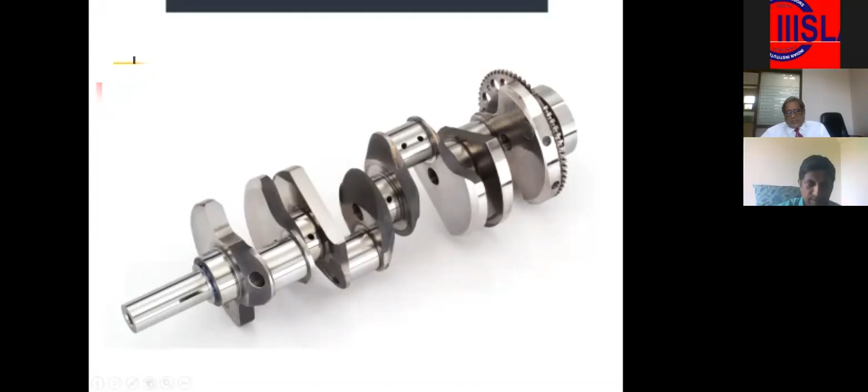Whenever it fails, yes, but technically, because of the problem, because of the quality of the oil, because of the operational condition, there is erosion in the pin.

As a result, whenever it undergoes a breakdown, it goes for machining. Piston, yes, piston is an item of limited life. There is no doubt about it.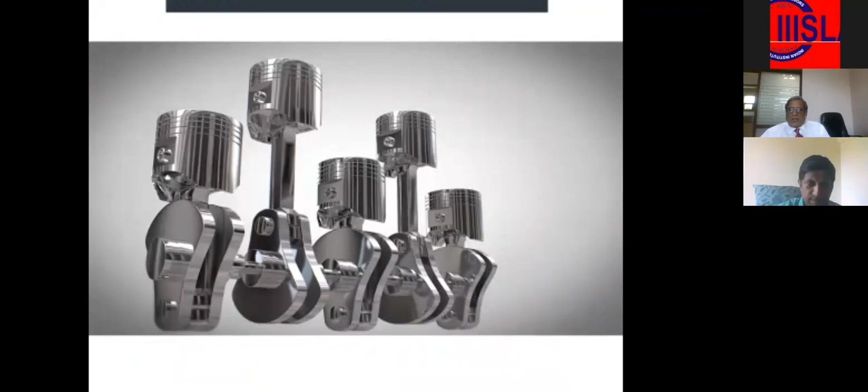Liner is also an item of limited life, no doubt about it. Connecting rod - a connecting rod is an item of limited life. Actually it is not, because you have bushes here, right?

Bushes will take care of whatever wearing happens. Whenever there is a replacement, the replacement will be about the bushes, right? So it is not an item of limited life, because there are bushes between the piston pin side and between the crank, big end bolt and small end bolt.

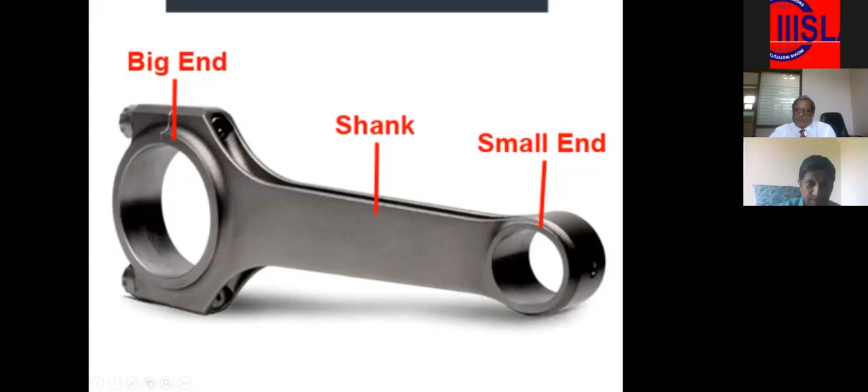Normally whenever an engine is repaired, it goes for a major overhaul, simply because there is normal wear and tear. So it is neither payable, nor related with the breakdown, and does not normally fail. It's a very long life item.

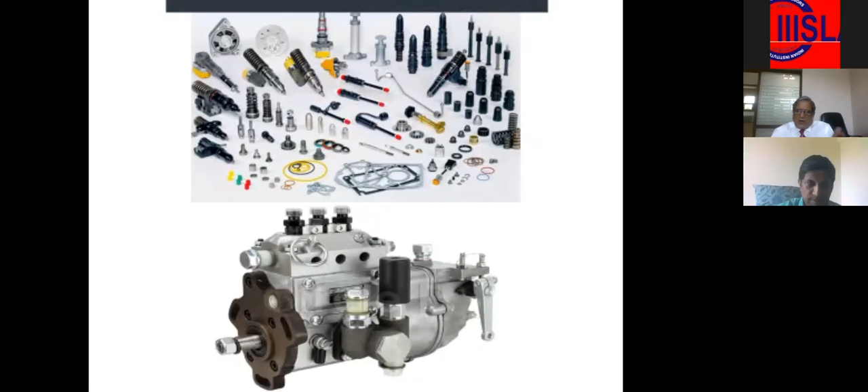Now, PCB card - do you deduct depreciation on a PCB card? Now, many surveyors I've heard follow certain cyclic depreciation on this.

In my opinion, this is not an item of limited life in the sense of a machinery insurance policy. It will work as long as the machine works, and there's no sustained life, there's no cyclic life, there is nothing like that. No depreciation should be deducted on PCB.

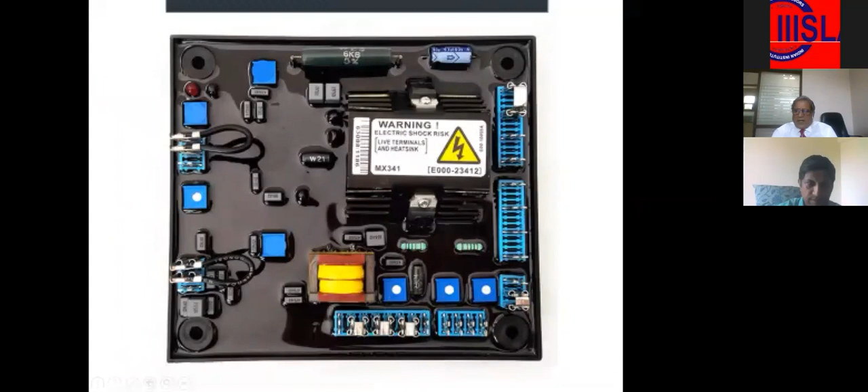AVR, it is also a circuit - no depreciation should be deducted. Now blades of turbine - no depreciation should be deducted.

Push rod. Push rod - during operation, what happens if the engine is not properly synchronized? Whenever you open any working engine, you see these are bent.

These are bent in a profile, because push rods are there to take the shock. They take the shock - they follow the cam and the valve timing, and they take the shock.

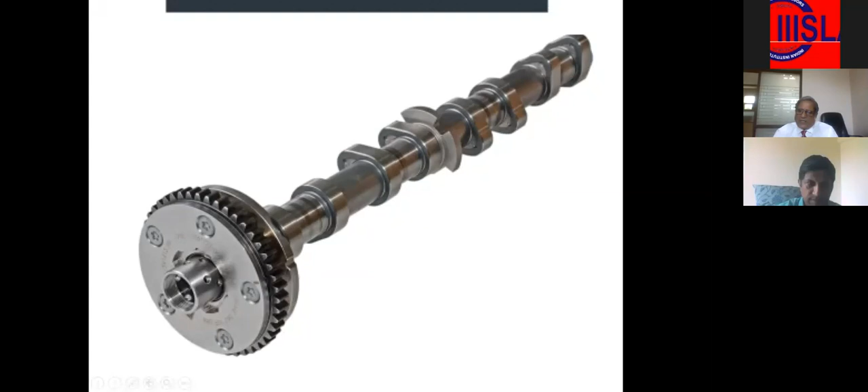It does not last till the life of the equipment - it wastes away and is replaced during the engine's life. Now valve and valve seats - they are also wear and tear items, so there is no question about it.

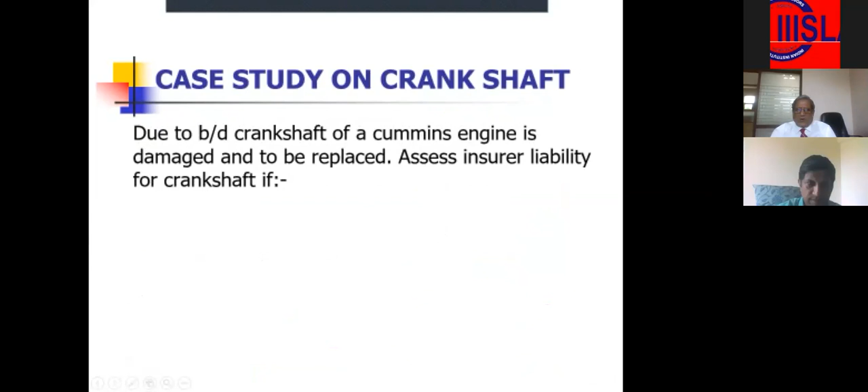So this is my case study. This is a small case which I'll overlook now. Now coming back here, back to this.

Provisional repair: necessary provisional repair is allowed, and such repair cost contributes a certain amount as allowed in the policy. Final repair does not add to this, so if somebody has to do provisional repair before the final repair, it will not add to the total repairing expenses.

In-house repair: suppose a party repairs the machine themselves using their own inventory. The cost of material used from their own store, wages incurred, and a reasonable percentage to cover overhead charges are considered. Cost of parts is taken from the store ledger, wages per day of the supervisor apply, and overhead expenses mean the reasonable value of production time for in-house machine facility used in repairing. This is mentioned as overhead expenses, which I have tried to explain here.

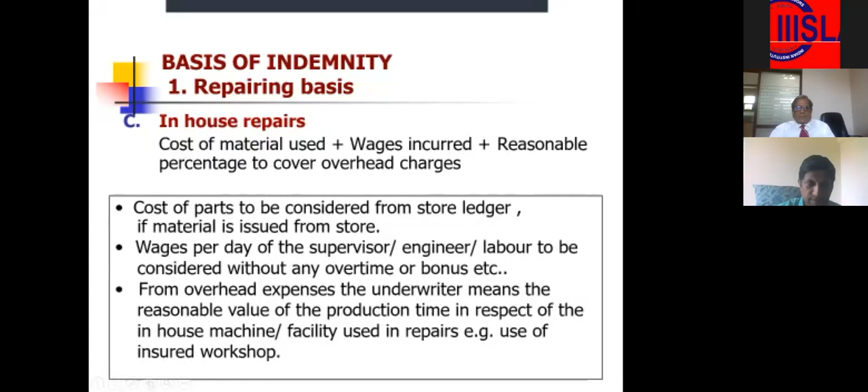Total loss is the important part. If the cost of repairs as detailed above equals or exceeds the actual value of the machinery insured immediately before the occurrence of the damage, the settlement shall be made on the basis provided for in B.

If the cost of repair as detailed above, which we have discussed, equals or exceeds the actual value of the machinery insured immediately before the occurrence of damage, the settlement shall be made on the basis provided for in B below.

In case where an insured item is destroyed, the company will pay the actual value of the item immediately before the occurrence of loss, including cost of ordinary freight, erection, and custom duties, if any, provided such expenses have been included in the sum insured. This is about duty included in the sum insured.

Actual value means, as per the method we have calculated, the liability out of the repair by this method. Now the liability we have treated by this method.

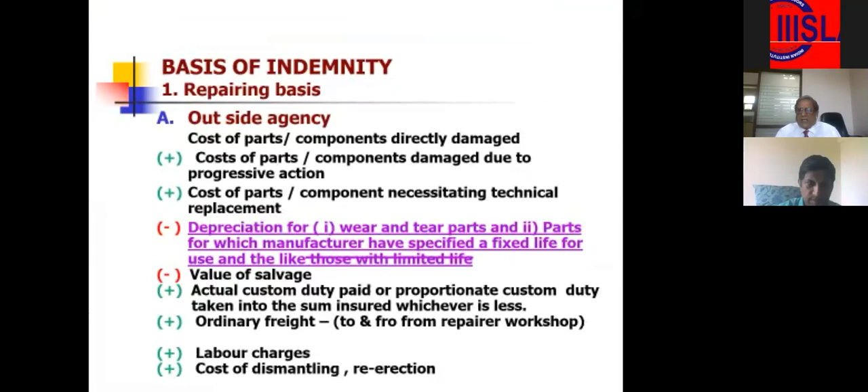If this now equals or exceeds what we have discussed above, equal or exceeds the actual value of the machine insured immediately before the occurrence of damage, settlement shall be made, but then it will be a total loss settlement.

Now this explains how the actual value will be arrived at. He says in case where an insured item is destroyed, the company will pay the actual value of the item immediately before the occurrence of loss, including cost of ordinary freight, erection, custom duties, if any, provided such expenses have been included in the sum insured. Such actual value is to be calculated by deducting proper depreciation from the replacement value of the machine.

It means that if the cost of repair, which has been discussed, exceeds the actual value, then the claim should be settled on total loss basis. And what is the actual value? It is arrived at by deducting proper depreciation based on the life of the machine.

Suppose there is a compressor which failed, and after all deductions, suppose the repairing cost comes around 4 lakh rupees. Now, the new compressor costs around 6 lakh rupees, and we deduct depreciation of 50%. Say it is 10 years old, then the liability on total loss basis will be 3 lakhs.

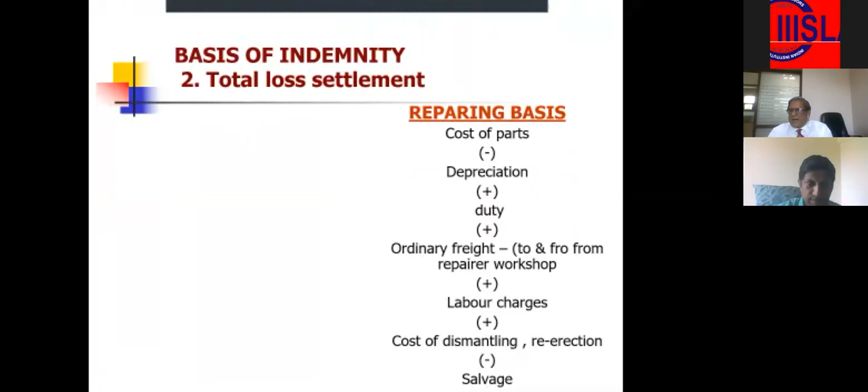So there is an issue, and I also feel that proper consideration for making it a total loss should be based on considering freight, dismantling charges, and salvage also. But if you strictly see the policy, it does not follow this. So that's a point I am leaving for you to examine yourself and share with me what you think about this.

Or my interpretation is all right, or it is okay. So that is food for thought for all of you, and I'll discuss it further — I'll request you to kindly go through it.

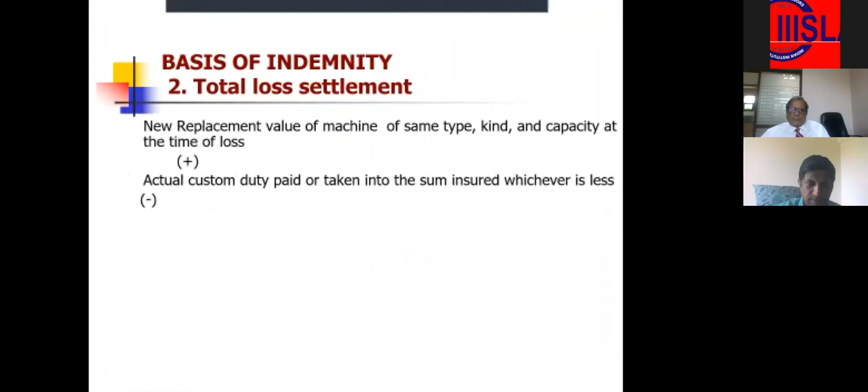Now, total loss settlement is this. This is a total loss settlement, where we pay — these are the components for total loss settlement.

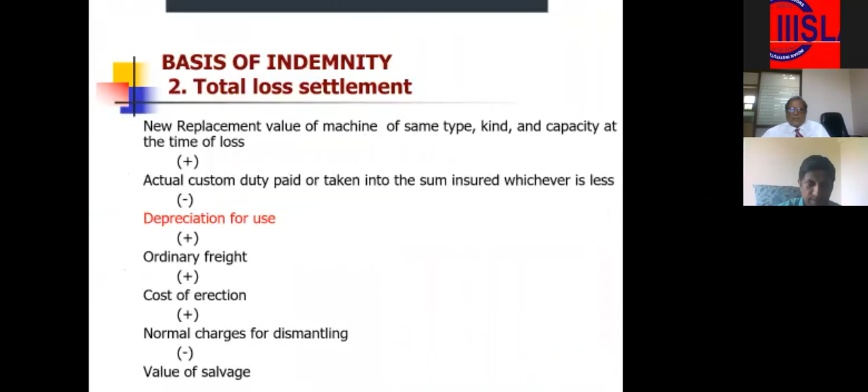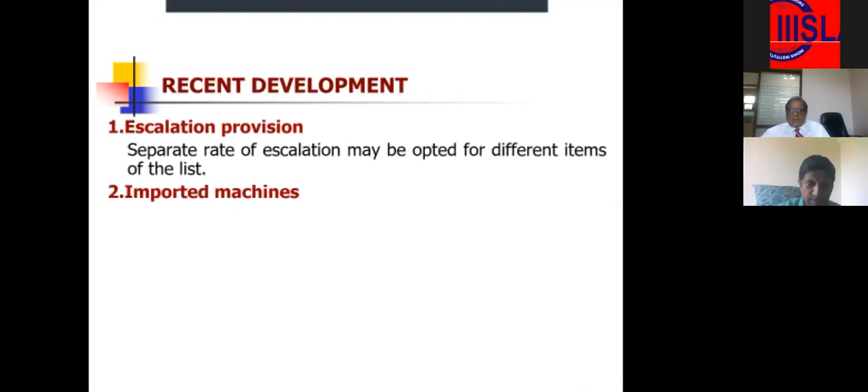Important endorsements — these are endorsements that some of you may not know about, such as the custom duty endorsement. There are certain recent developments: the escalation provision is there, and imported machines can now be repaired — it was withdrawn earlier, but now they can be covered. So this is my entire presentation.

No question? Question and answer. Yes, sir. Yes, now. Wonderful.